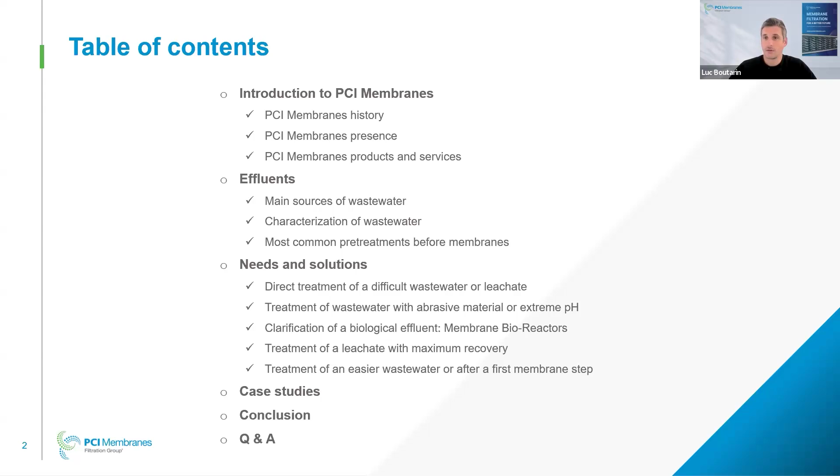So, PCI Membranes. PCI Membranes originates in the 60s in the United Kingdom. It was first developed for seawater desalination with tubular membrane, and then it moved to other applications. The business really started up in the 80s. What's important to know is that 20 years ago we moved to Poland, so we are now a Polish company, part of the European Union, and our manufacturing plant and legal entity are close to Poznan in Poland.

7 years ago we were acquired by Madison Industries, which has a filtration group. The filtration group is 29 companies, all dealing with filtration - could be filtration of air, of effluents, of liquids. We all have different specialties. Our specialty at PCI Membranes is the filtration of liquids using organic membranes.

Our presence: head office, manufacturing plant, customer service, R&D are all located close to Poznan in Poland, so Central Europe. We still have a small technical office in the United Kingdom, and we have sales staff and technical staff all around Europe. For example, I am based in Tours, between Paris and Bordeaux in France. We also have a global network of local partners all around the world, and our sales staff is not only in Europe - I have colleagues in USA for the Americas and colleagues in China for Asia as well. Please do not hesitate to contact us to get your local contact for PCI Membranes.

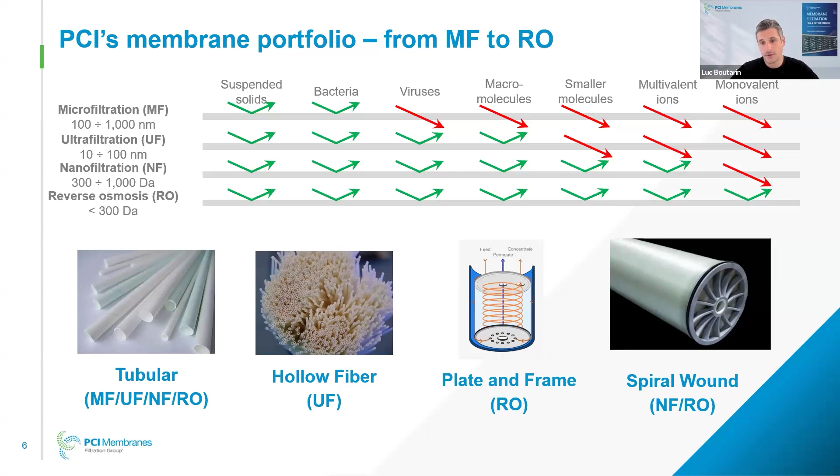Our services: we are a company that loves to develop new applications and do trial and testing. We have a fleet of about 10 pilot units that we can use in-house in Poland, or on-site. So we run lots of trials.

Either we receive effluents in Poland and do the trial there, or we send our pilot on site. With this, we can do lots of trials, mainly with tubular and spiral wound membranes. It allows us to clearly define if the membrane is the right one, if it's possible to do it.

And to carefully design a commercial plant. Then in terms of delivery, of course we are a membrane manufacturer, so we supply membranes and modules. But if you need a wee bit more from us, we are also able to supply frame, stacks, racks, or units on skid or containers.

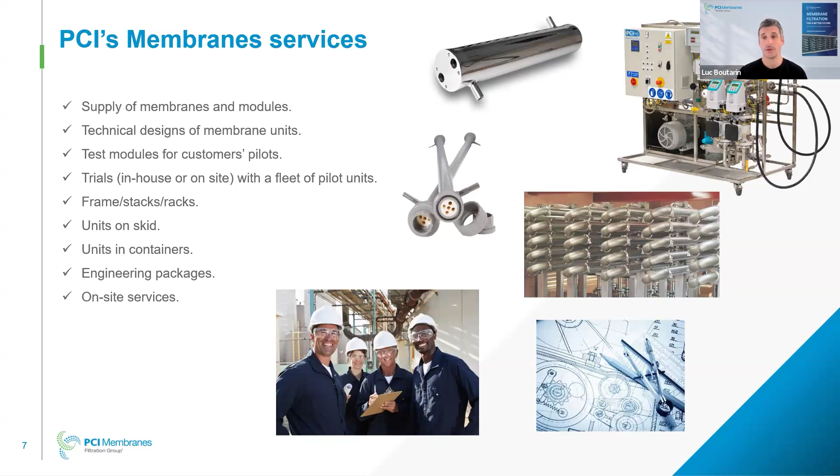We'll use subcontractors, but it's something we can do for you. If your agenda is too full and you need some help, we can do it. We also supply on-site services, and a really interesting feature is that we supply engineering packages. If you are building your first tubular filtration unit, we are able to help you by supplying engineering packages for you to carefully and correctly build your unit. So please do not hesitate to contact us if you need this.

Okay, let's dive into our subject today, which is basically wastewater. So the effluents we are talking about. Wastewater can come from lots of different places. I will just discuss the main ones today. Obviously, we all know about municipal wastewater. Every city has to have a plant to treat this municipal wastewater.

We also have landfill leachates. All our waste is going to a landfill, and then with humidity, there's a collection of liquid that got all the bad stuff from the waste, and it's called a leachate. It's a quite difficult effluent to treat, but it can be treated with membranes.

And then a major part of what we do with wastewater is industrial wastewater. So any type of industry can have wastewater - food and beverage, mining, chemical, textile, electronics. It's really important for them to treat their wastewater in order to release it either to the network, to nature, or to be able to reuse the water. More and more, we want to reuse our water, and membranes are one of the best solutions to do it.

Other types of wastewater can include condensates, which can be treated with membrane. And please do not forget that in every plant you have, you need to do washing, CIPs, cleaning in place. Those spent solutions can be recycled with membranes, so it can be a further saving on money and further savings on water.

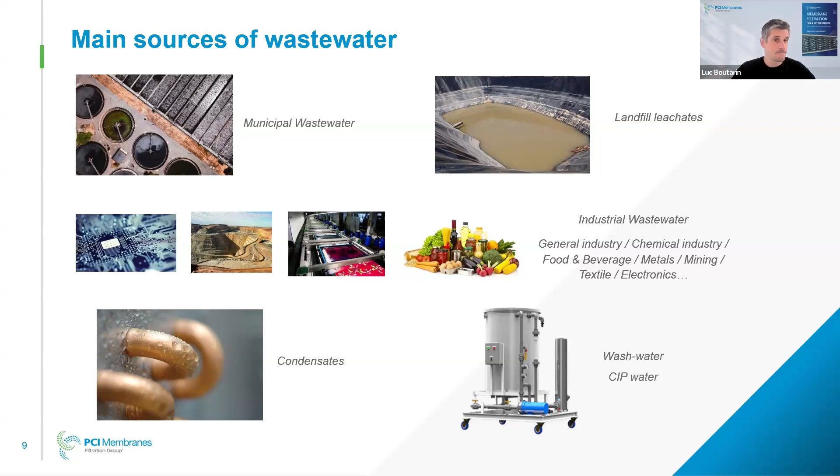The most important thing to do before you treat your wastewater with membrane is to do a characterization of your wastewater. If you have a problem, you need to clearly define your problem and what you want to do before you choose the best geometry, the best membrane, and the best solution. Sometimes the membrane is not the best solution, but to know about this, you need to characterize your wastewater. So it's really important - get as much info as you can.

Okay, sorry, I have a glitch in my screen. Okay, it's back.

So here are the main parameters we will look at: the temperature of the wastewater. It's important to know your minimal and maximum temperature, first of all because membranes cannot withstand every type of temperature - some can go up to 80 degrees, some only up to 30 degrees. So you need to know the limit in order not to harm the membrane. And the temperature will change the viscosity of your effluent and the viscosity of the membrane, so the flux, rejection of the membrane, and the operating pressure will not be the same depending on the temperature. So it's really important for you to define this.

Same for pH. Some membranes cannot withstand every type of pH. Some will be limited to 1.5 in acid, 10.5 in alkaline. You have to carefully check this not to harm the membrane.

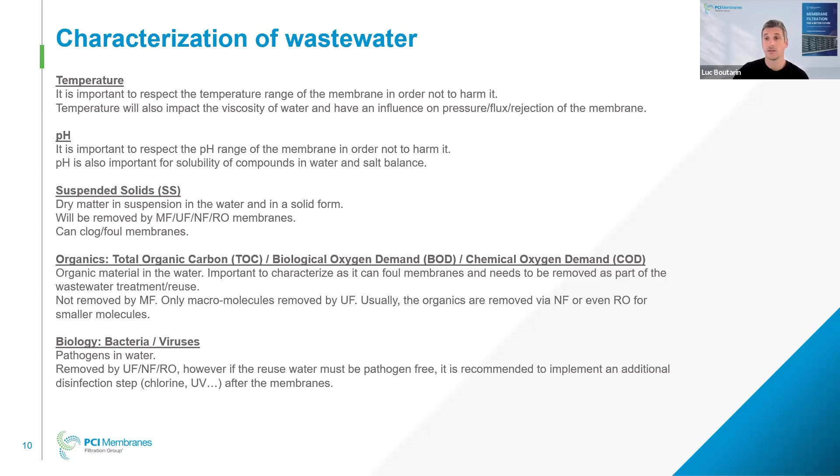In terms of biology, bacteria and viruses will be removed by UF, NF, RO. Bacteria can be removed by MF as well. So it will be removed by membranes. However, if you need pathogen-free water, it's usually recommended to add a safety step after membrane like UV or chlorine. An oxidant, disinfectant is just an extra step to be extra sure.

Metals, they are in soluble or solid form. Solid form will be considered like a suspended solid, but you'll have to be careful. Metals can be abrasive, and membranes do not like abrasion, apart from one type of membrane. Soluble form, usually for membrane treatment, we oxidize or precipitate it to put it into solid form to be removed by membranes. However, the soluble form will be removed by reverse osmosis, but it can foul the membrane. So the lower the soluble content, the better it is for membrane treatment. So be careful of metals.

Fat, oil, and grease. Membranes do not like fat, oil, and grease. So it will lead to fouling, and it's usually a fouling that's quite difficult to remove and to clean. Some geometries can allow you to treat small amounts, especially tubular membranes, so usually below 100 ppm, but normally in almost every time we remove this before membranes.

Solvents have to be characterized because they can harm the polymers, the organic membrane, so you need to characterize it. Chlorine will be okay for MF/UF because the polymer used in those applications are resistant. But if you are using NF and RO, it's usually polyamide. Polyamide does not like chlorine. Chlorine will oxidize the membrane and it will be destroyed and cannot be fixed. You'll have to replace the membrane. So please be very careful of free chlorine with polyamide in NF and RO.

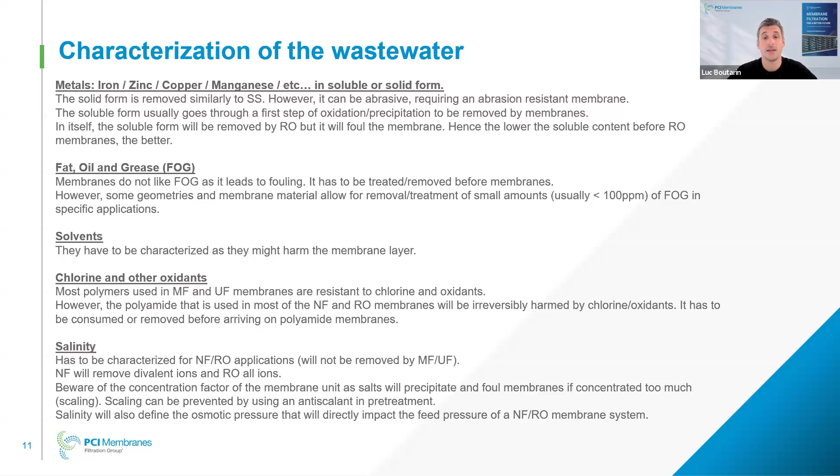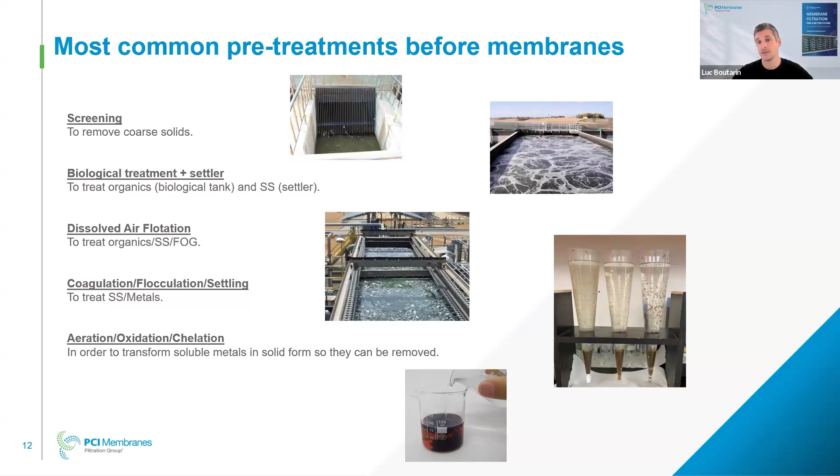That's it for the water. I want to emphasize again, it's extremely important to clearly define your wastewater before you move on to the solution, because the characterization of your wastewater will lead you to the correct solution.

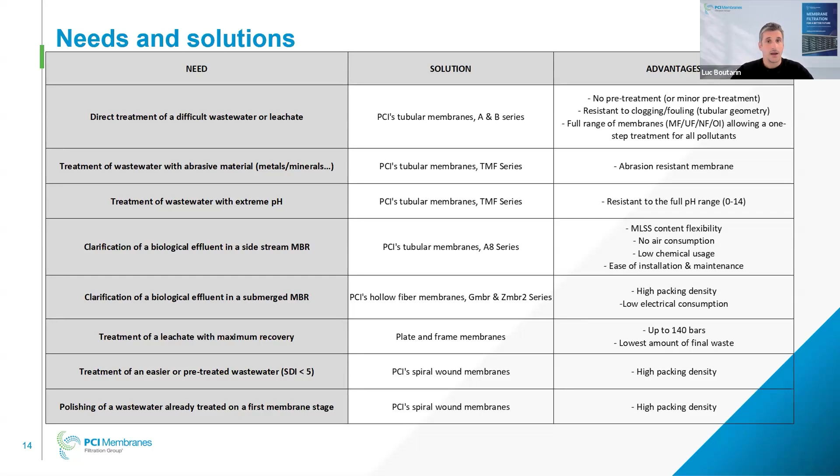I will now show you every type of need and solution.

So let's say you have a difficult wastewater or a leachate. It's a difficult effluent and you want to do a one-step treatment, directly treat it. Then you'll have to go to tubular membranes.

Tubular membranes, it's a geometry that's suitable for high viscosity, high suspended solid, high organics, because it's highly resistant to fouling and clogging. We are using tubes of 6, 8, and 12.5 millimeters in diameter, so it's very difficult to clog it.

It's robust, reliable, it's easily maintained. Usually you don't need pretreatment, so it's a one-step treatment. We don't need lots of chemicals to treat it.

It's also possible to do a mechanical cleaning on this geometry using foam balls. So mechanical cleaning allows you to do more advanced cleaning and to use less chemicals, which is specific to the tubular geometry.

It's very modular. It's a very easy to use membrane, and we can do MF, UF, NF, RO.

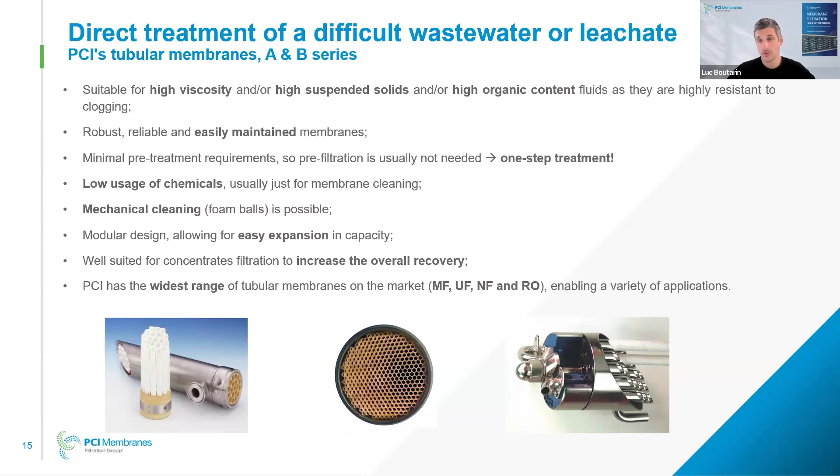It has two disadvantages though. One, the membrane area in tubular form is quite low due to the geometry, and two, you need a recirculation pump to get a good cross flow into the tubular membrane, so you'll use some energy. But apart from that, it's very efficient.

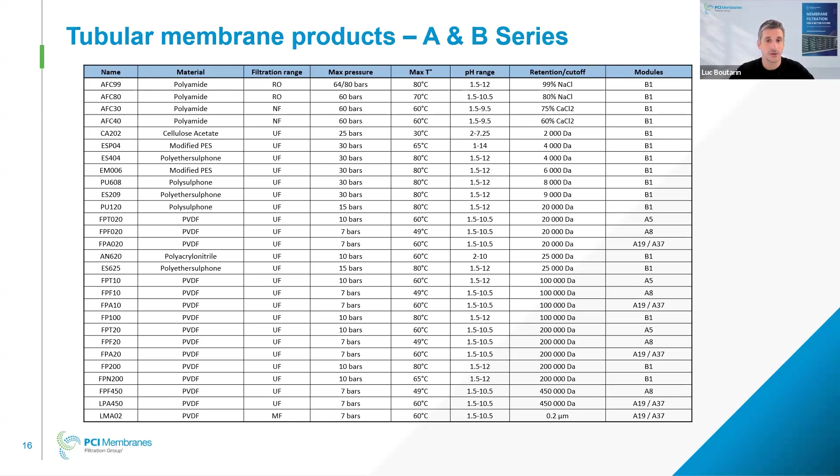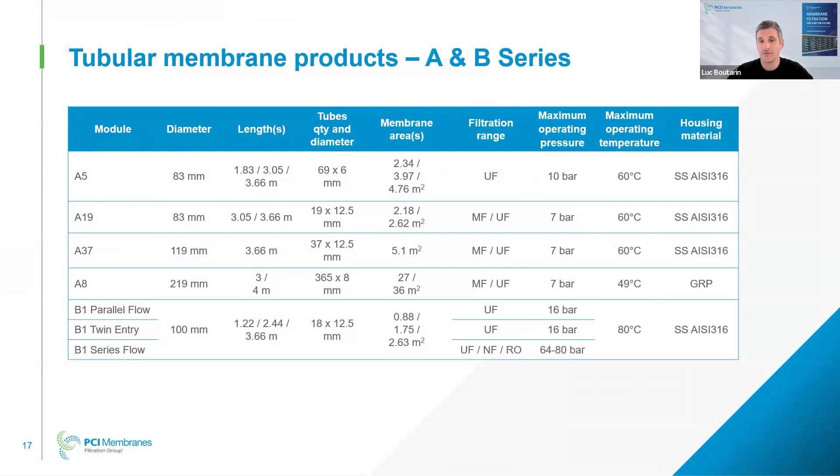Modules, we have different types of modules with different sizes. I don't want to go too much into details today. Obviously, if you have a specific subject, we can discuss it in more details later on. But basically, those modules are used with tubular membranes from MF to reverse osmosis.

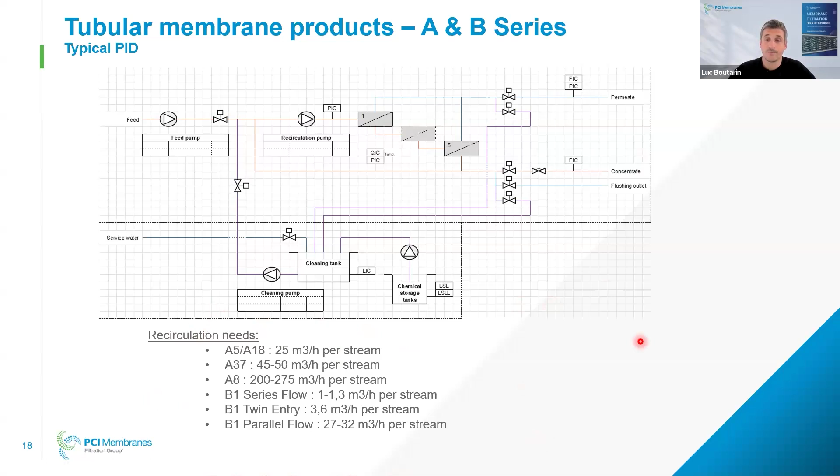Here are the recirculation needs depending on the type of modules. As you can see, those are quite high flows. So it's important to know that for tubular treatment, you need quite a high flow recirculation loop. But that's what makes it so efficient and resistant to fouling.

Polymers used in organic membranes do not like abrasion, and they do not like extreme pH, which is a limitation of this technology, unless you come up with a new technology like PCI's TMF. TMF is a different type of tubular membrane which is resistant to abrasion and resistant to extreme pH.

Why did we change? We changed the mechanical support. Instead of tape, we are using a polyethylene substrate, basically produced by a sister company of the filtration group. Inside the polyethylene, we inject PVDF. So it's not just a layer of PVDF, it's PVDF inside polyethylene.

This makes it extremely resistant. You can backwash it, you can backpulse it, you can treat pH from 0 to 14, you can treat abrasive materials. So it opens up a new era of applications with organic membranes: recovery of metals, recovery of minerals, abrasive suspended solids, recovery of acid, caustic, extremely concentrated chemicals.

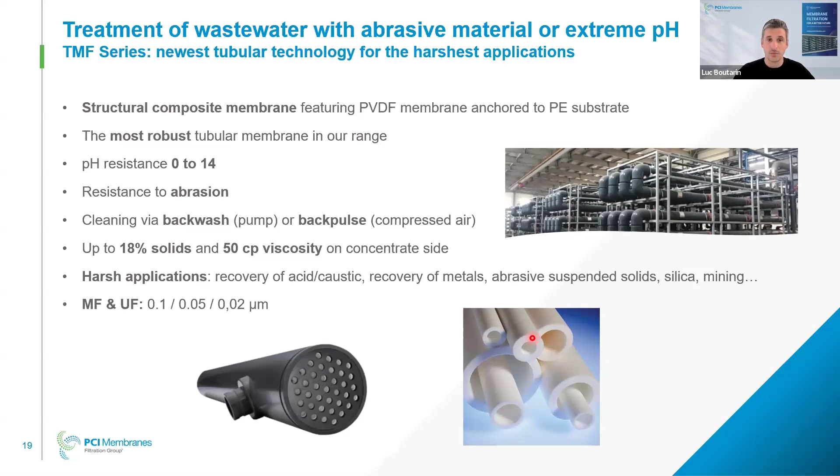That's extremely interesting. These membranes being PVDF, they come in MF and UF, so 0.1 to 0.02 micron.

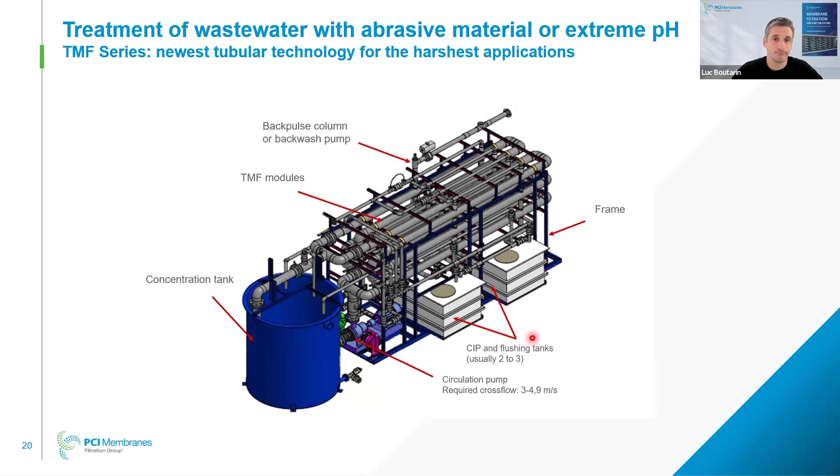Now let's move to membrane bioreactors. What do you do when you have a biological treatment of your wastewater? The most common treatment is to have a biological tank with bacteria treating the organics, and then you have a settler to separate the biomass from the water. A settler is nice, but it takes time and space. If you want, you can replace the settler with membranes.

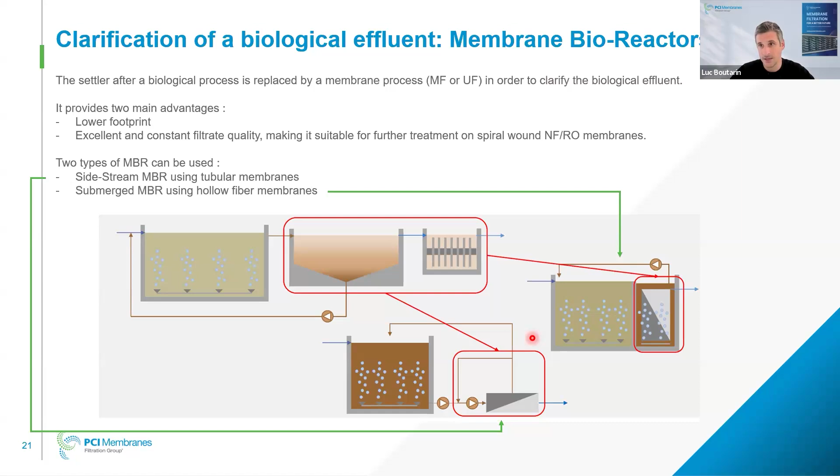That's a membrane bioreactor. There are two types. The first is side stream, which is an external filtration unit using tubular membranes. The second is submerged MBR, a very common one, where we put membranes inside a tank with the effluent, and we suck the water out of the tank, leaving the biomass and suspended solids inside the tank. Those are the two solutions used in membrane bioreactors.

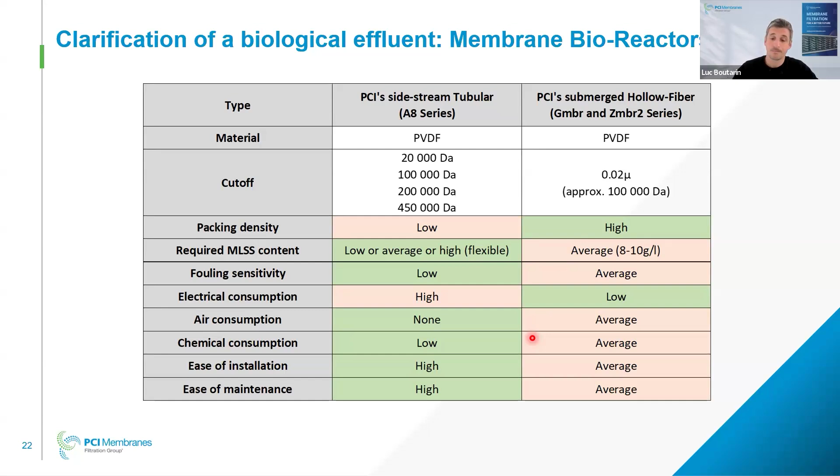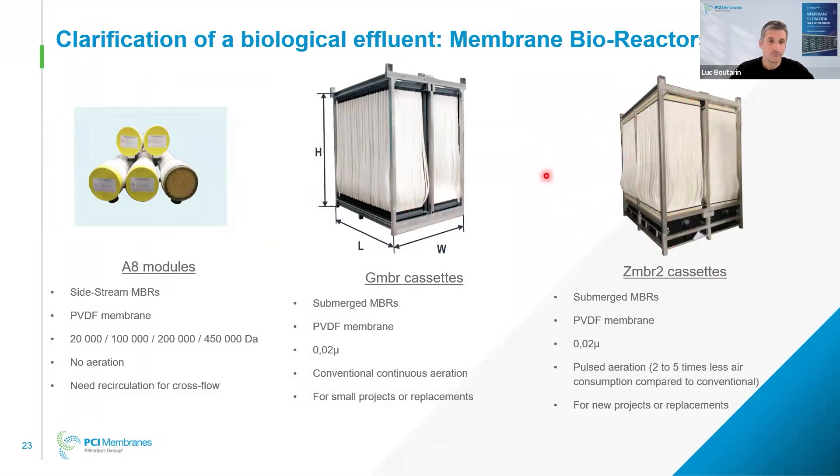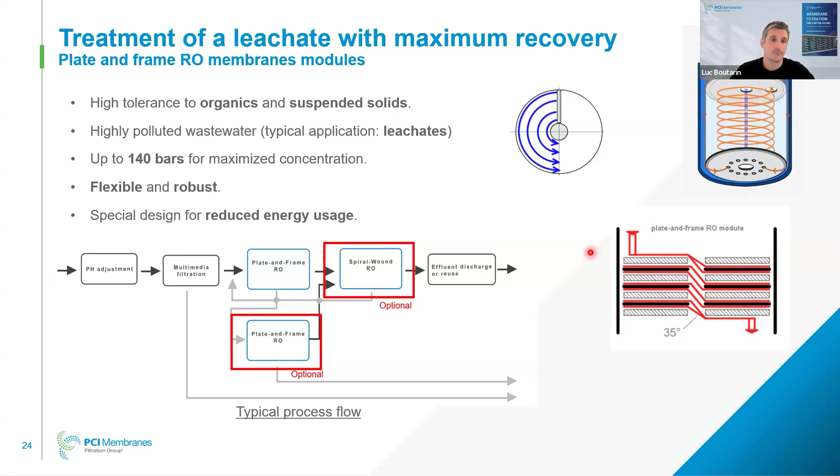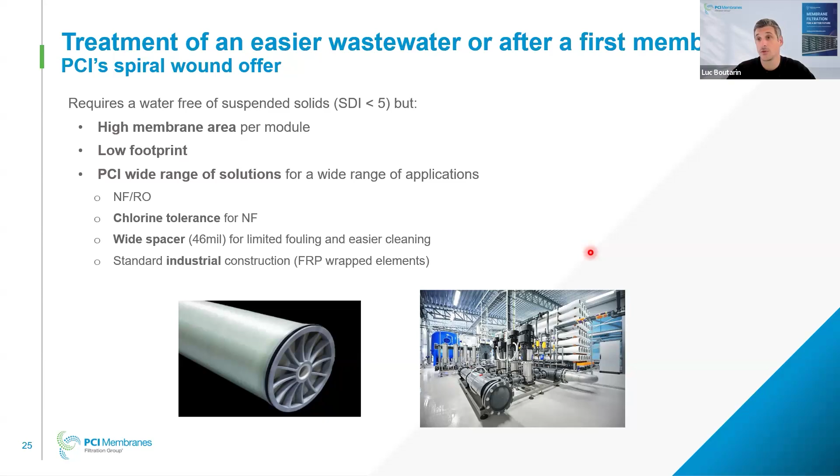We have some NF with chlorine tolerance, which is quite nice, and I will show it to you. And then our standard elements use 46 mil spacer, which is thicker than most suppliers because we specifically target wastewater, and the thicker the spacer, the lower the fouling. So it will be easier in terms of operation and maintenance.

So 2 ranges. The first one is called the Dura, which has a standard spacer, 28 mil, and the standard membrane area, standard compared to the market, but it has chlorine tolerance, up to 10 ppm continuously and up to 100 ppm in cleaning, which is really interesting.

And then other type of membranes, which are not chlorine resistant, will have lower membrane area, but a 46 mil spacer, which is clearly targeting wastewater for lower fouling and easier operation and easier cleaning.

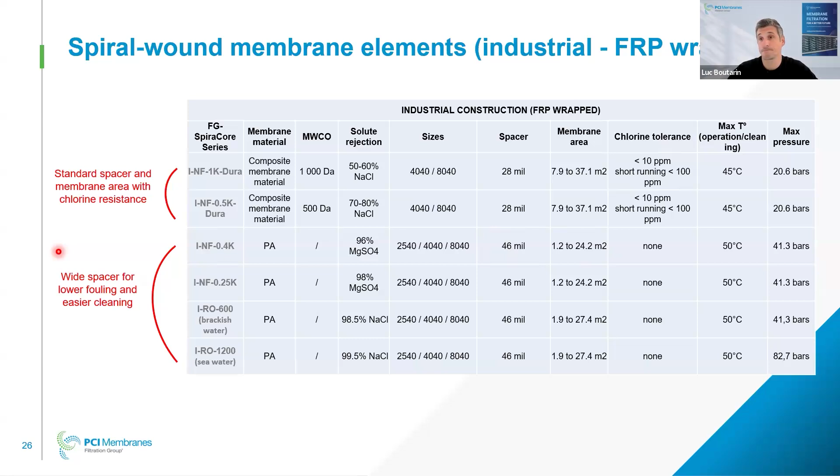So we have seen several needs and solutions in terms of wastewater and membrane treatment. That's theory. Let's move to real life. Today, I wanted to focus on tubular membranes for the case studies because this is what we mostly make at PCI Membranes, and tubular membranes are not well known on the market, and it has really nice applications. So I wanted to discuss something that is not really well known on the market. So mostly tubular membranes today.

First case study will be potato wastewater. The end user is a potato processing plant in Europe. They needed to concentrate and recover protein and potassium from a wastewater that was quite hot, up to 70 degrees.

And for cleaning, we use foam balls and chemicals. Foam balls allow us to decrease the chemical usage and increase the efficiency of cleaning.

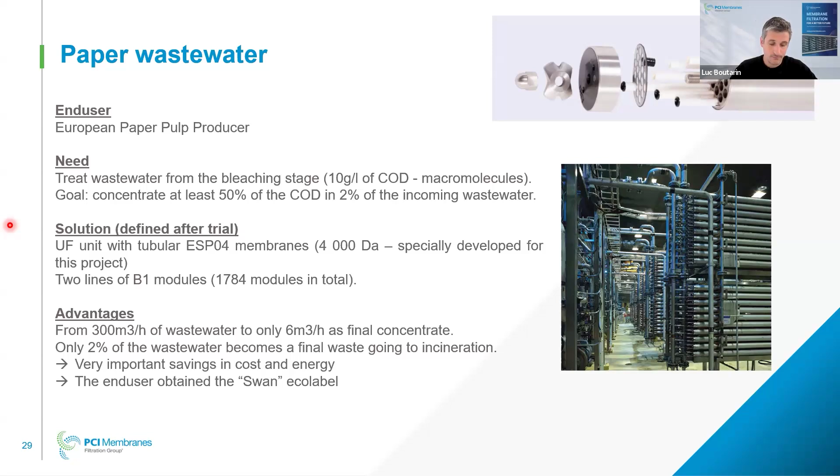The problem is that the concentration and the viscosity of the washwater was quite versatile. So it's not always the same concentration, it's not always the same viscosity. After trial, we defined that B1 modules with AFC 99 RO tubes, 12.5 millimeter tubular, with foam ball and chemical cleaning, were quite efficient.

Why? Because it's a one-step treatment. It's adaptable to various types of quality and viscosity, which was the main issue of the end user. The tubular membranes can adapt to different types of concentration and ever-changing wastewater. And they reuse the permeate, so they are saving some water and some money. So they are quite happy about it.

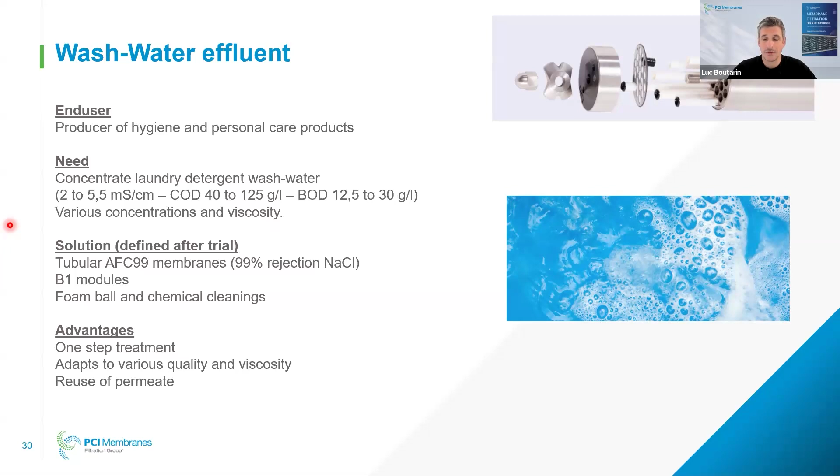Next case study will be a leachate after a biological treatment. In a European landfill, there was an existing biological treatment, and they wanted to recover the biomass from the biological treatment and concentrate the waste. So it's a two-step treatment.

One, we used tubular UF in order to concentrate the biomass. Factor of concentration is 10, and it's returned to denitrification. The filtrate goes to a tubular RO using B1 and AFC 99, so we can concentrate the UF permeate. Concentration factor 5, concentrate being the final waste.

So we reduced a lot the flow of wastewater. RO permeate from tubular is polished through a spiral-wound unit for reuse, because there are still a few salts and a few molecules in it, so it's just a last step of polishing before reuse. That's really nice.

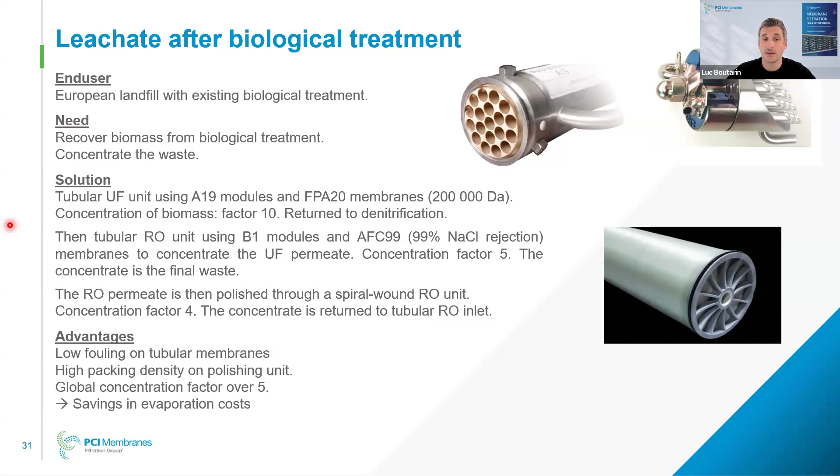So as you can see, we have low fouling on tubular membranes. The polishing unit with spiral-wound has a high packing density. If you take the 3 units, the global concentration factor is over 5. So they saved a lot in terms of evaporation costs.

Leachates can also be treated directly with tubular RO. Same in the European landfill, no biological treatment. There's variation in volume, variation in quality, and we need to concentrate it as much as possible to reduce the final waste and also to reuse the water.

They used 1 unit of tubular RO membranes, concentration factor 12, and of course what they loved is that it's a one-step treatment. It has low fouling thanks to tubular technology. They can have lots of variation in terms of volume and quality of leachate, and they recover 92% of the wastewater that they use internally as reuse water.

So savings on evaporation, savings on water, savings on space because it's only 1 unit. So it's really nice.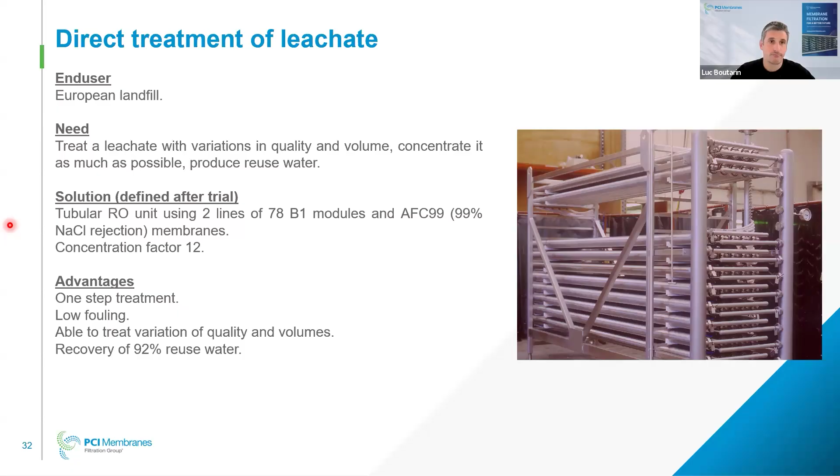Conclusion. As we have seen today in our webinar, you'll have lots of options with membranes, okay? It's not one problem, one solution. But what membrane will provide you is an excellent quality of treated water and possibility to reuse this water for lots of savings. As I have said, one problem can have different solutions. It's very important to define your problem and what you want to achieve to define the different solutions.

Please define correctly the wastewater to be treated, the pollutants to be removed, the targets in terms of permeate concentrate quality, and the concentration factor you would like to achieve.

If the application is known, it can be directly designed into a commercial unit, but in lots of cases, because we love at PCI the difficult cases, we'll go through trials, because we love to develop new applications and to treat wastewaters that have never been treated before, or to improve existing processes.

Again, as I said, one problem, different solutions, and that's what's really interesting with membranes.